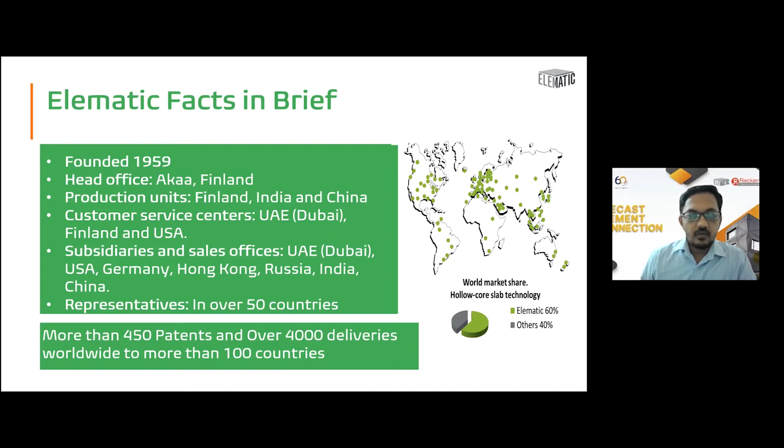It is designed in Finland and then goes across. It has production units in Finland, India, and China. The customer services representatives are in UAE, Finland, USA. We have subsidiary offices and sales offices in UAE, USA, and various other areas. And representatives are there in over 50 countries. With this small introduction, I'll also give a small introduction about my department.

So this is basically a design team which I'm leading, where I have an expert team of structural engineers and BIM modelers, building information modeling. The major experience that we have is in design of precast as well as cast in situ and steel structures for all types of structures, industrial, commercial, from low rise to high rise. And we are very much confident in different codes like IS, ACI, European, New Zealand, and British standards.

So as a design team, the services that we provide to our customers are precast designs. We do high-rise building design. We do feasibility studies. We do various calculations and quick cost analysis. We do pre-stressed concrete design. We have building information modeling of all the disciplines, not only structures, but architecture, MEP, as well as 4D and 5D sequencing.

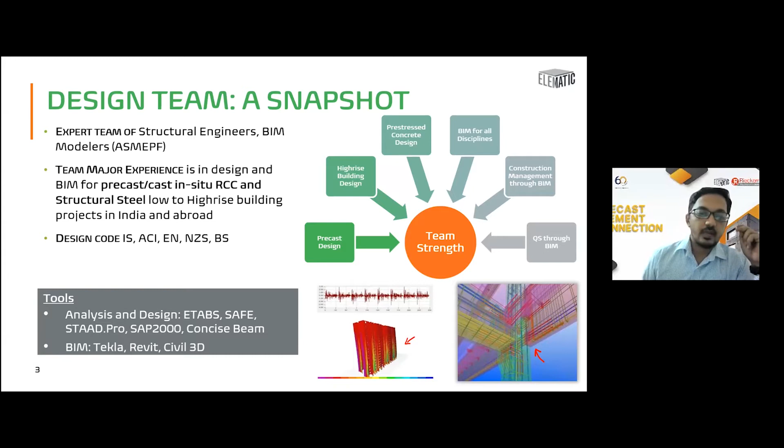Okay, so starting with the precast connections. So as I told you, precast connections definitely form a very integral and important part of all precast buildings, because precast connections ensure that all the elements of the precast, which are cast on ground and then erected at site, behave together and do not fall off from each other.

So depending upon the intended purpose of the precast connections, we can categorize them into different types. The basic category of precast connection is between dry connections and wet connections. Now, the difference is that in the dry connection, there is no grouting or in situ concreting required to be done.

You have embedded steel plates with anchor bolts coming out. And the other precast column is also having the same steel plate with anchor bolts coming out. And then on site, you just connect them using an in situ steel plate with anchor rods. So this type of connection is fast, but obviously it does not behave in the same way as the cast in situ structure.

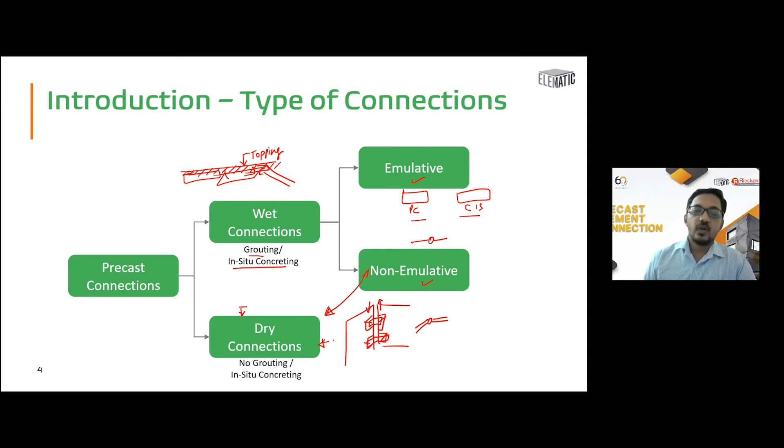Moving on, there are other categorizations of precast connections also, depending upon the requirement or the exposure of the precast connections to seismic waves. Because in the presence of seismic forces, the forces are of reversal and cyclic nature. So the precast connections will be subjected to quick cyclic and quick reversal of forces, which they should be able to withstand. Those are the seismic connections, which I will show you in a short while, the differences between them.

And the other type is the non-seismic connections. Non-seismic connections are the ones where the major purpose of the precast connection is to carry forward the gravity load, whether in the form of moment transfer or shear transfer. Its purpose will be primarily limited to gravity load, not reversal cyclic loading.

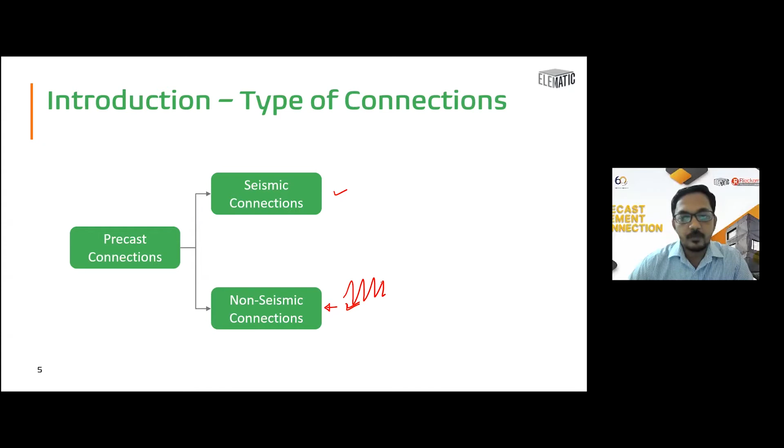Okay, moving on to the next one. So here I'm starting with the connections part. I'll be showcasing mostly all the connections that I have been using. The way I have formulated this presentation is in three parts: commercial, residential, and industrial. So we will go category wise and see what types of connections are used in different scenarios.

So here is one of the buildings that I'm doing, which is a tall structure. It is a 50-story, 40-story structure.

So the top 35 stories we are doing in precast. This commercial structure is majorly office, and these are the types of connections being utilized. If I go into detail on each connection: in the first connection, you have the perimeter beam, which is connected with your precast solid slab.

Here, in order to ensure that the beam is successfully tied with the topping, we have projected the inside bar of the beam outside into the topping area, and one bar is going inside the precast solid slab. The purpose is that the beam has to be tied with the topping. All the precast elements have to be tied with the topping and intertied with each other. That is the advantage I get from this type of detailing.

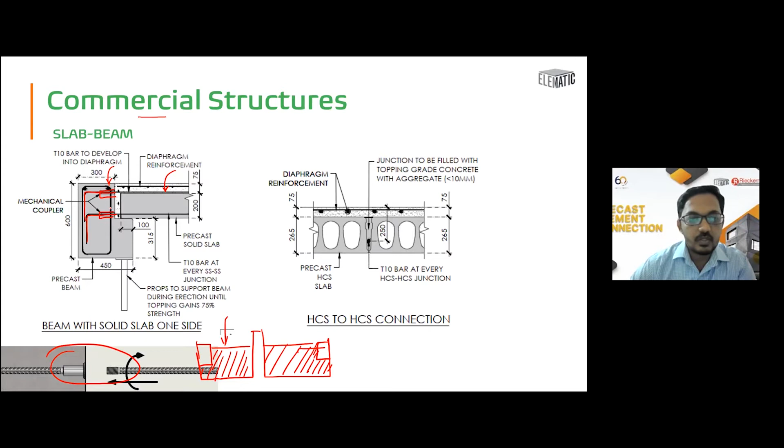These blockout boxes cannot accommodate reinforcement projecting out from inside. That is the main purpose of providing the mechanical couplers. This thought process should be in the designer's mind even when doing the detailing for the first time on any project, to ensure that production is smooth.

Coming to the next connection, hollow core to hollow core. Here I would like to highlight the criticalities. One is that you have this groove on both sides, which is very thin and narrow, around 30 mm to 50 mm. So to fill this joint, it is important to have an aggregate size of less than 10 mm so that it goes inside well. Secondly, we have placed a 10 mm diameter bar at the HCS to HCS junction.

The purpose is that whenever there is differential loading, with the hollow core on the right loaded more than the left, a shear transfer is required for both slabs to act together, and it has to happen through this joint. Therefore, the reinforcement and the aggregate size ensure that the shear capacity of this joint is strong enough that differential loading does not lead to differential settlement and failure of this joint.

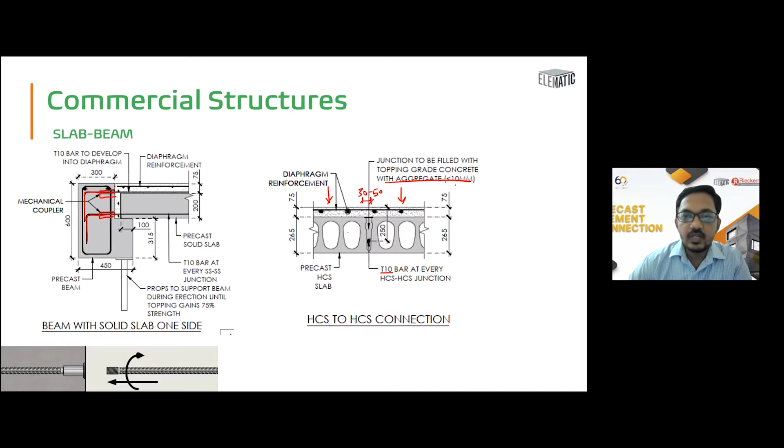That is why between hollow cores at a typical floor, you normally require one reinforcement bar here, as well as a grout or topping material. We have used the same grade as the topping, just filled inside with aggregate size of less than 10 mm. Okay, moving on to the next connection.

We also need to see the erection sequence that should be kept in mind. When you are placing the hollow core slab only on one side, there will be a tendency for this beam to twist when the topping has not yet been cast. In order to support that, we provide these props at regular intervals when we are erecting the hollow core slab. Once the hollow core slabs are erected, the topping is placed and the topping gains 75% of its strength, only then are these props removed.

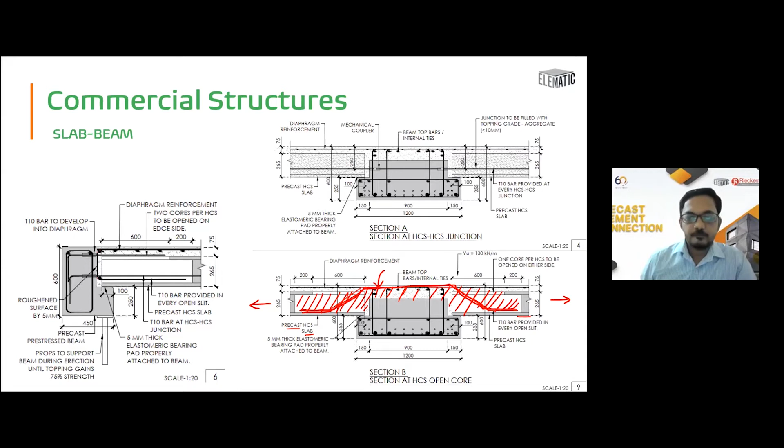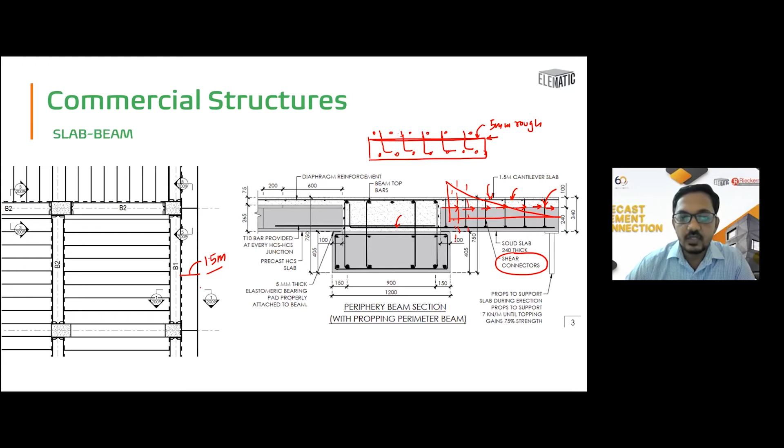Now, some people roughen the top surface, which can also be done; 5 mm roughness can be provided. But for this critical kind of situation where we have the cantilever slab coming out, it is good to provide these shear connectors at every regular interval when you are doing the topping. This way, both elements will behave together, and there will be no chance of failure.

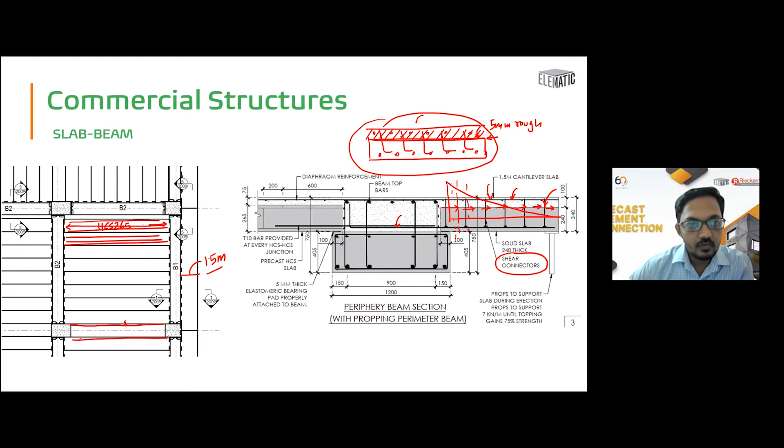In commercial structures, this is another type of structure I would like to talk about. If you see in the plan view, I'm coming back to the plan view for a second. This is my hollow core, HCS 265, which is resting on this side and on this side. But my question is, what will happen on this side, and on this side? When we have a beam on this side and on this side, resting is not required here because it is a one-way span. All my strands are spanning in this direction. So what should the connection be here?

The problem with this type of connection is all your main strands are in the perpendicular direction, in this direction only, but there is no reinforcement in the precast slab in the horizontal direction. So if you stop this edge, and this edge is a little free to deform, together they will start deforming. This edge will go down, but this edge will remain up. So there are chances of bending moment stresses in this direction. Since we have not provided any reinforcement in the X direction, it is not good to have connections supporting the hollow core slab on one side on the beam.

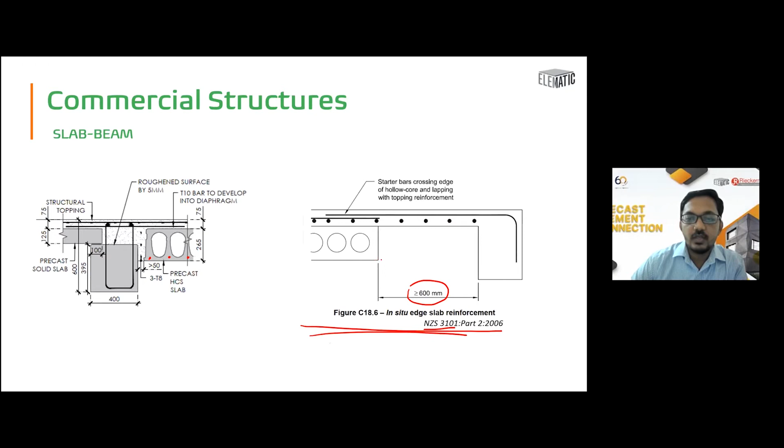If you see the cast-in-situ slab edge reinforcement given in NZS 3101, they provide this gap of 600 mm done only as topping. It is the same theory behind this. The only thing is this could be a good solution when we have a false ceiling below, so that it doesn't look awkward to any observer below and raise concerns of structural problems. So where we don't have a false ceiling below, we provided this type of connection where a 50 mm gap was given.

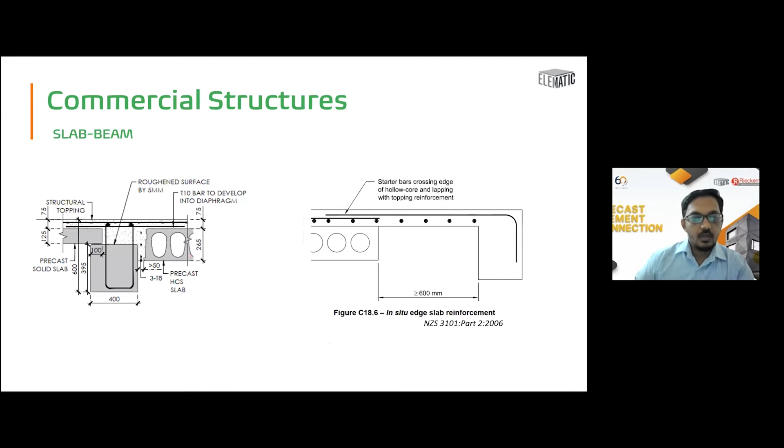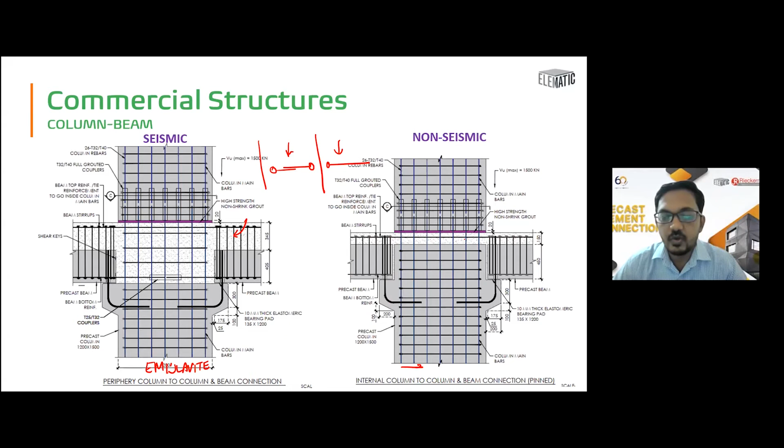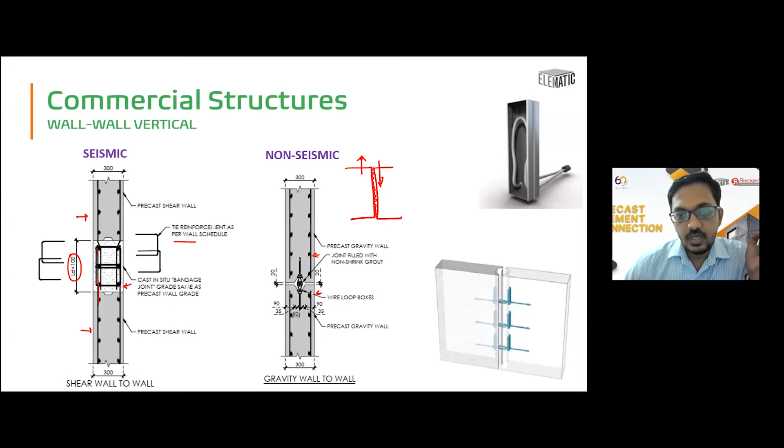If one wall settles and the other wall is at this particular location, then there will be chances of formation of cracks, which we don't want. But at the same time, we don't want these two walls to behave together. So that is where this type of Peikko wire loop connection comes, which has a wire loop box, a kind of box inside which you have this kind of flexible wire. So somebody can just simply pull this off once it is installed. Once the element is cast, you can just simply pull this off.

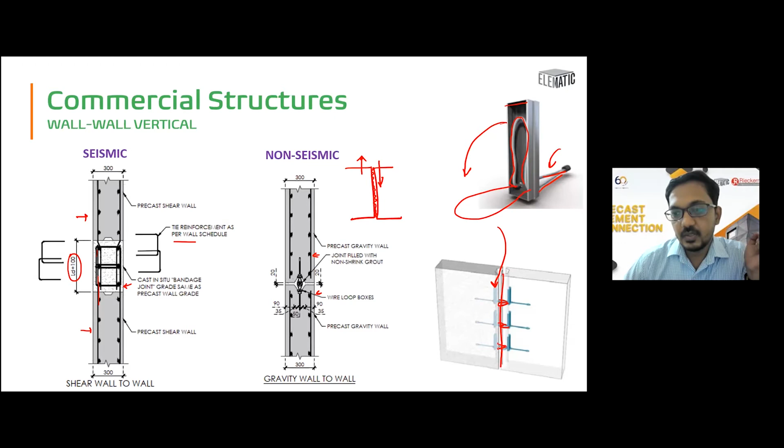So then it will come and it will form like this. So this is what you can see over here also. It has come from both sides, and then a bar is placed inside together, looping these two. So the shear behavior happens because of the presence of this groove, as well as when the concreting is done, the concrete flows inside this cavity also, which was created when the casting of the wall was being done. So effectively, your joint concrete, in elevation, looks in this format, which helps in transfer of the shear as well.

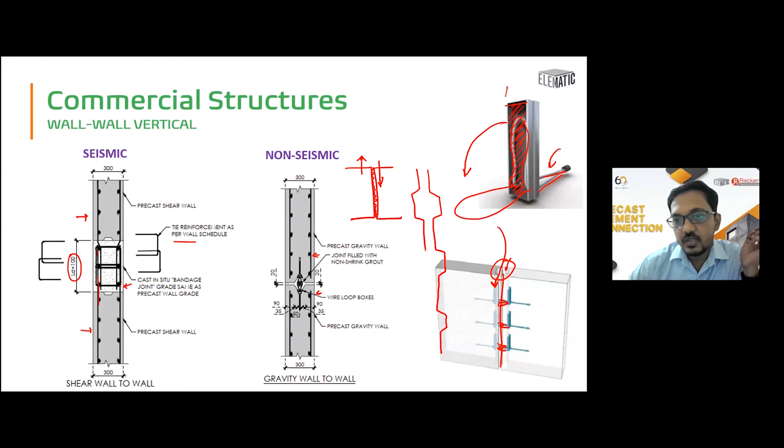Quickly moving on to the next one. So this is the example of the commercial connections, where there are two types of connections, as you can see. In one case, on the left side, the main longitudinal bars are going continuous from below to above. This type of connection in our tall structure we are taking in the lower stories, while the other type of connection we are taking in the above stories, where the reinforcement requirement is very low. So here we have bars stopping over here, and only the middle bar is continuing above.

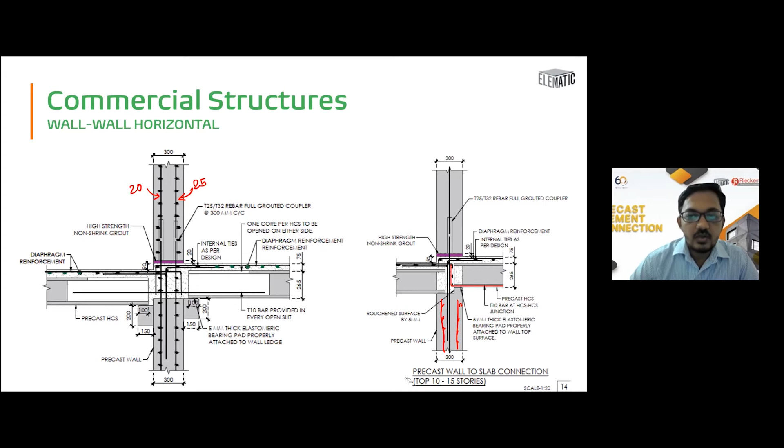But here, if you have a vertical bar diameter of say 20 or 25 that is going to come over from top to bottom, then replacing those with a single dowel will require a huge amount of bar and very low spacing, which we don't want. So here, the continuity of the bar becomes important in the lower stories, where the stresses are going to be very high in the walls. But in above floors, where the stresses are low and the reinforcement requirement is low in the wall, there we can go with a single layer of connections.

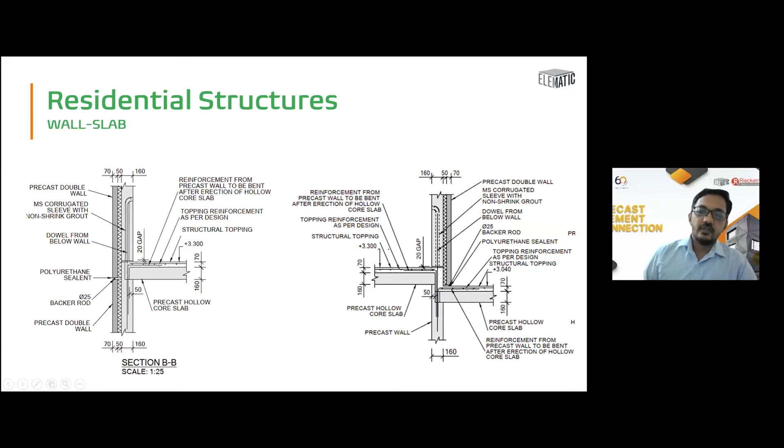So the advantage that you will get because of this is that even if there is rainfall and this wall surface becomes wet, the path of water to eventually come inside the floor is very difficult because it is against gravity. So that advantage you get if you have this double wall kind of system, which should also reflect in your detailing of precast connections. Same, if you can see on the right side, this is a floor system, and this was the balcony system. So in the balcony, we have the facade going all the way from up to down, which ensures the same water path becomes difficult, and it adds another layer of safety to your waterproofing systems.

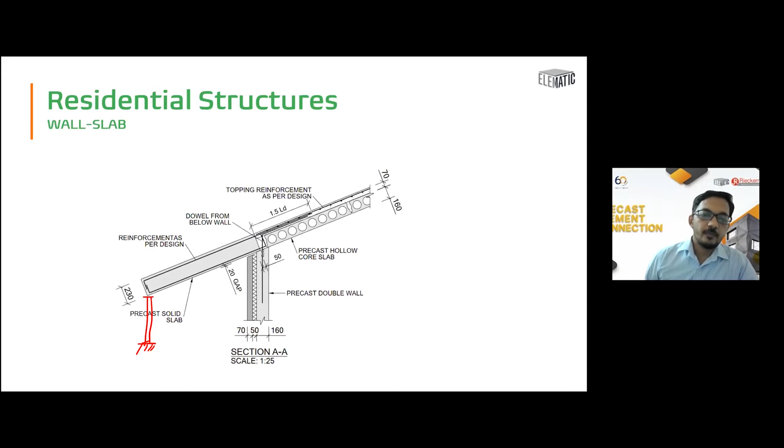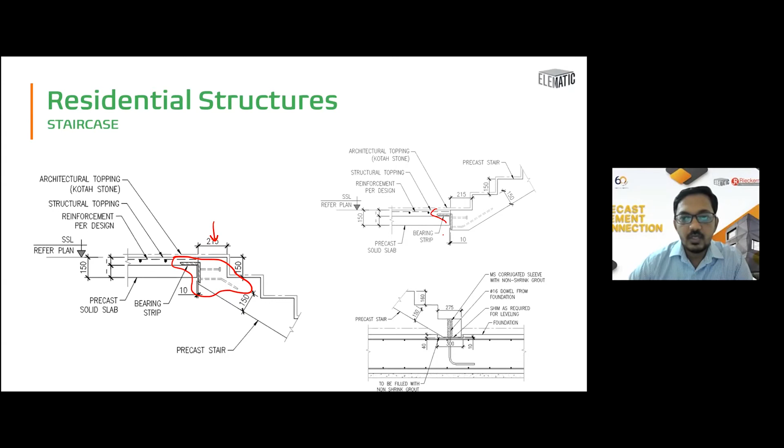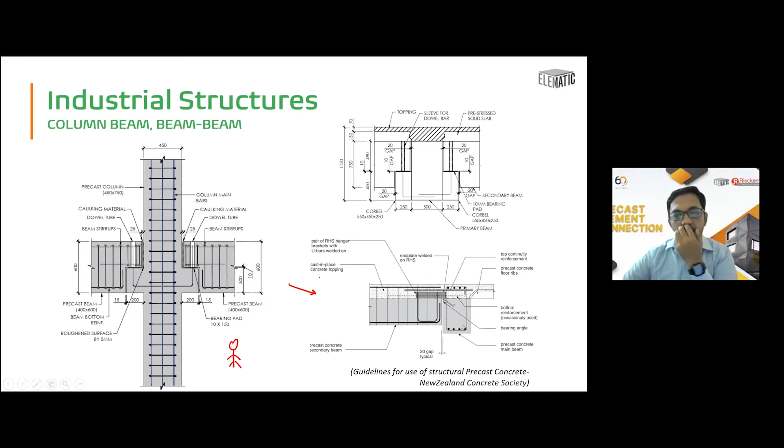An equivalent of that is also given in the guidelines for the use of structural precast concrete by the New Zealand Concrete Society, where they have embedded a steel plate along with the casting of the precast concrete, and then it is placed on top of your beam, provided with the proper supports, a proper base for the steel plate.

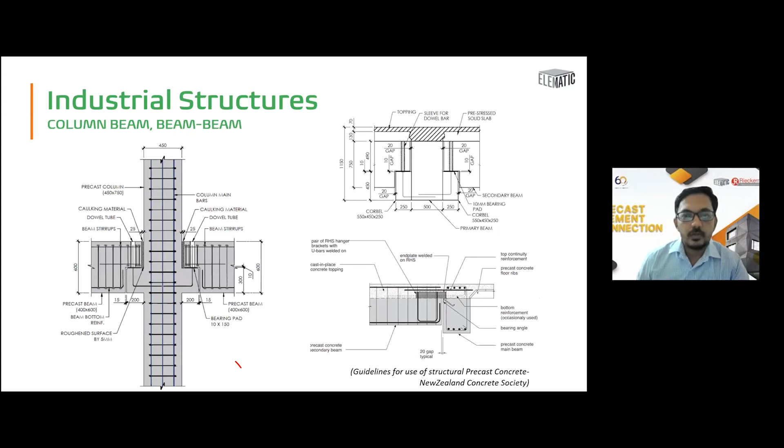So coming to the column to foundation connection, these are the basic connections where we have the dowel tube connections, the bar coming from below into the dowel tube, which we have seen, and the mechanical connections. I'm sure you must be thinking how these connections are going to behave in an earthquake. I'll come to that point later. But with respect to column and foundation connections, there are a number of solutions available, and I'm going to present a few here, depending upon the exposure that I have.

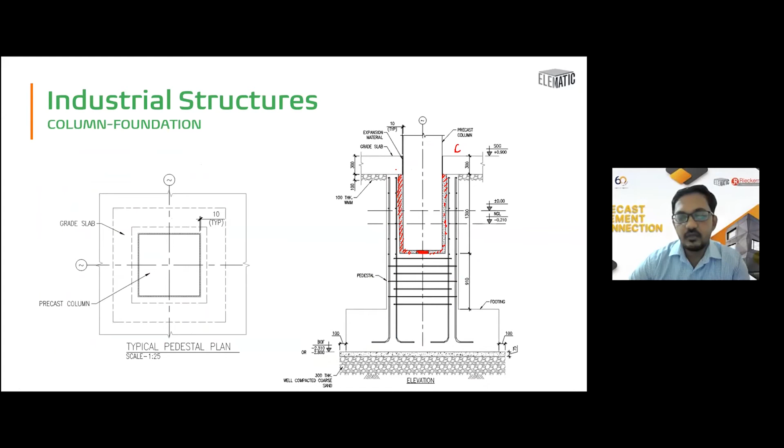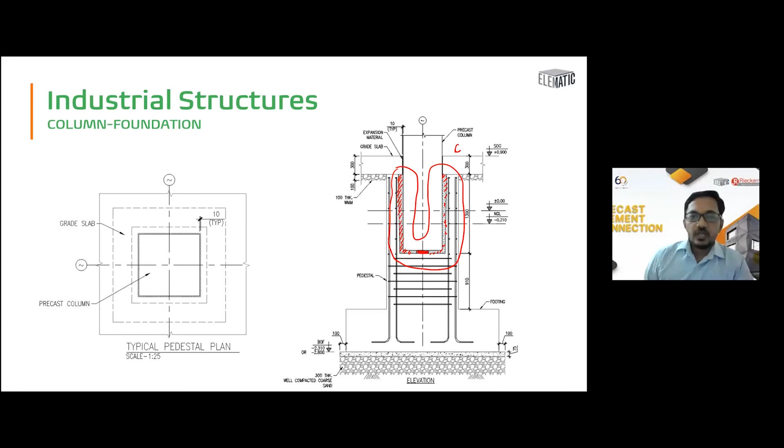So the important question that must be coming in your mind is what will happen in the seismic scenario in this particular case. There have been various studies done to acquire the behavior of these connections. One such study was done by Belleri and Riva, where they performed the cyclic loading test on the monolithic column foundation and the precast column pocket foundation. And similar studies have been done with respect to dowel connections and coupler connections. They found that in all those connections, the behavior, if not improved, was at least similar to that of the monolithic column connections.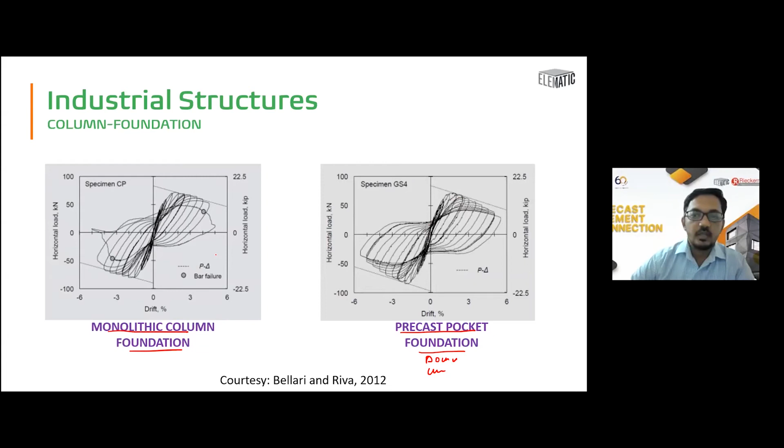So that is where we had the advantage. So it can definitely be said that it's incorrect to say that precast connections will not be able to sustain the cyclic loading, because the behavior of the structure is the same as that of the monolithic, and in fact the performance is even better and more consistent than the monolithic column foundation.

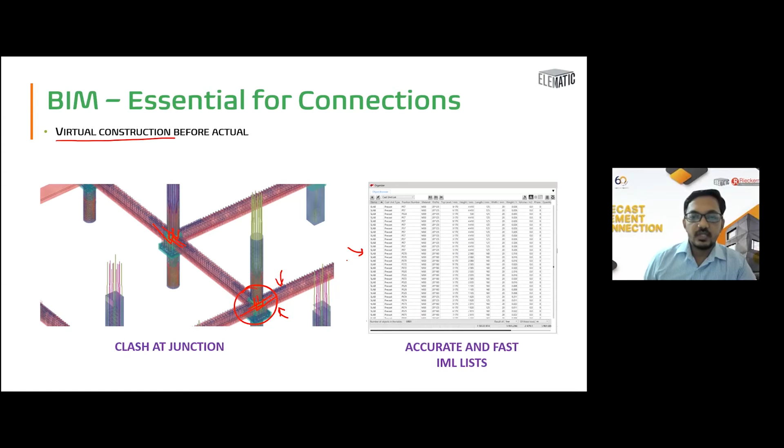At last, I would also like to explain the importance of building information modeling. As you can see, in the moment connection, a number of bars come from either side of the beam into the joint. So it is important in building information modeling to have the bars modeled accurately and checked that they are not clashing before you give out the shop drawing for casting. That way, as you're doing the virtual construction in your computer, any clash you can accommodate quickly in your changes, and you can ensure that no clashes happen at the joint while releasing it to site. Secondly, the advantage is also that you can get the insert material list output accurately.

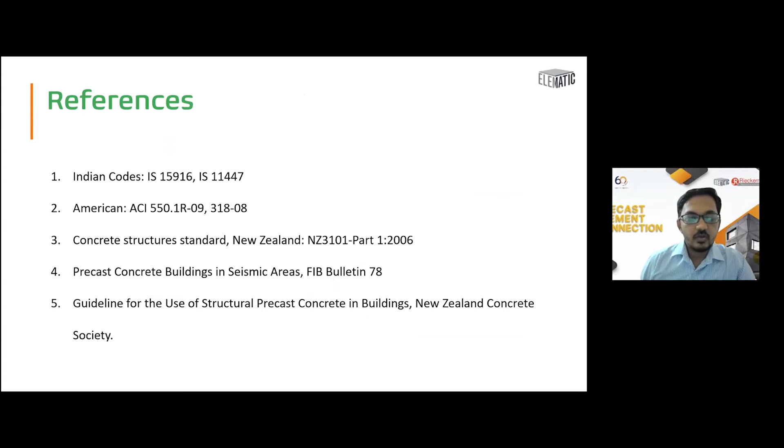Okay, thank you, Mr. Nishant Sharma, for the wonderful presentation. I think the key of precast construction is in the connection. Your presentation has shown very clearly the potential of precast in construction, and from that we can learn so much: the structure can withstand the seismic force beautifully, and we can also control the behavior of the structures. So with that conclusion,

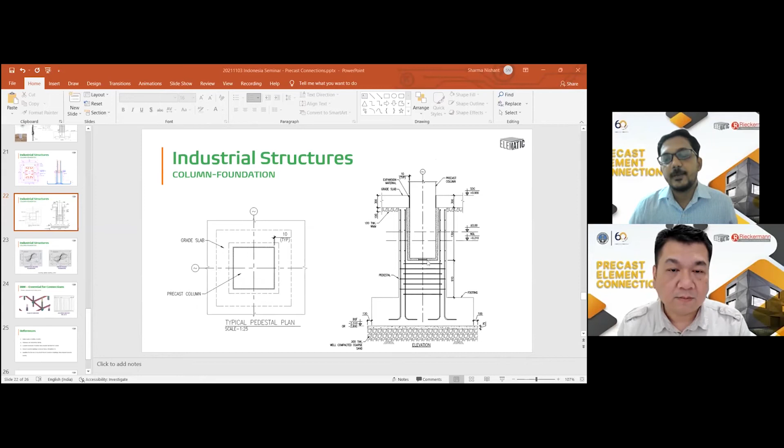Okay. So also the thickness of the pocket walls should be calculated also, right? Yes, absolutely. The thickness of the pocket walls has to be calculated based on the type of the forces that are going to develop as a result of action of these moment connections. So when you have the value of P and you have M and then you have V, this will translate into your local forces over here. So this is how they have explained that it's to be designed.

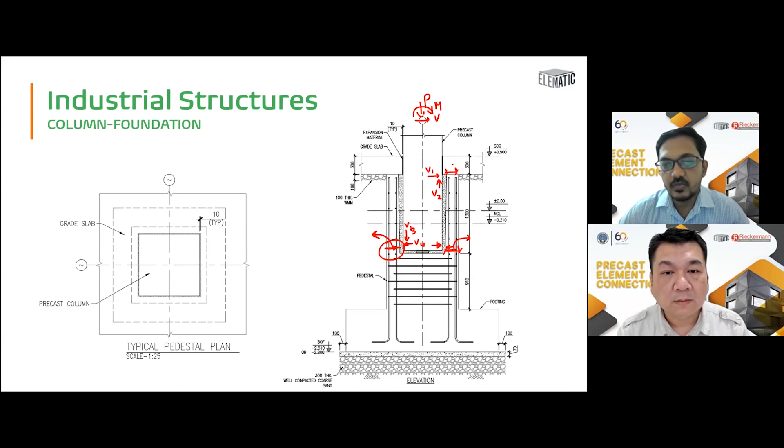So you will have these forces which have to be calculated, and these forces will then be coming as a kind of a reaction into your pocket. So this wall should be able to take that much amount of shear. So this is how we design the pocket wall thicknesses. And since the moment is very high and this is the moment arm, the base reaction over here is usually high. Therefore, normally you will find that the pocket wall thickness is very high at the lower end, but it reduces to a little lower value as we go up. Oh, okay. I think it's very clear.

Okay, any other question, please? We already prepared a significant amount of time so that we can have this kind of session. So please don't be shy to ask. And this is especially important because of the connection. If you have any question, please share your question and discussion.

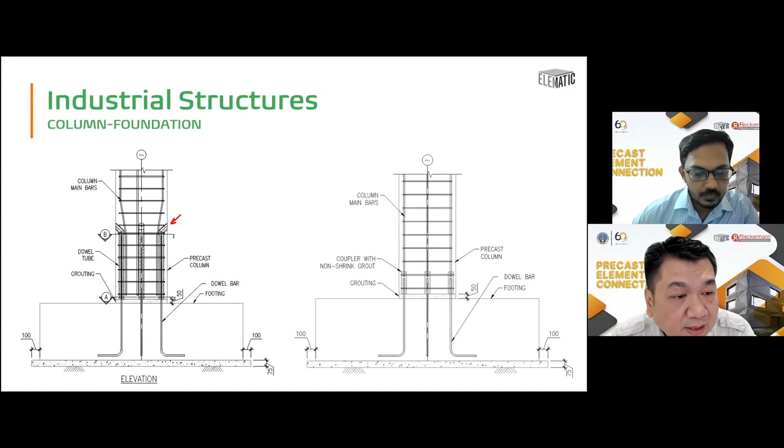Sorry, please return to the previous picture, the first picture. Yeah, this one. For the left picture, it seemed that the grout goes from top to bottom. Is it still the same as bottom to top, with no air? Here it is from top to bottom, but here the available sleeve diameter is very large, for example a 75 diameter sleeve. This is a corrugated sleeve of this shape, either 75 or 50 diameter.

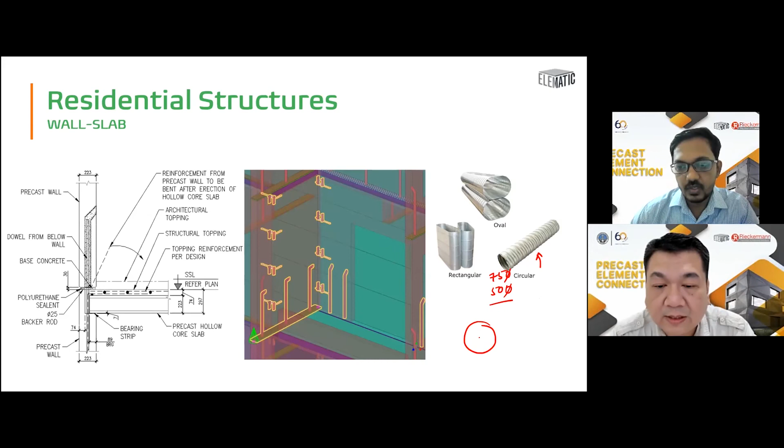So with this particular sleeve, your bar is going to be in the center, for example 20 diameter. This definitely gives you enough space on all sides. Here it is always from top to bottom. When you start pouring, it has enough space and it will fill inside.

And since the corrugated sleeve has grooves, it automatically bonds with the concrete outside. The grout, a non-shrink grout with a very small aggregate size, will also fill the inside of the grooves. So the shear connection between the grout and the corrugated tube is better from outside as well as inside. That is why we always use a corrugated tube.

Okay, so the conclusion is for the smaller hole, you always fill from the bottom up. Yeah. But for the larger sleeve, you can go from top to bottom. From the picture, there is still a large space from the top of the rebar to the top of the hole, so we can ensure the connection can be filled fully. Absolutely.

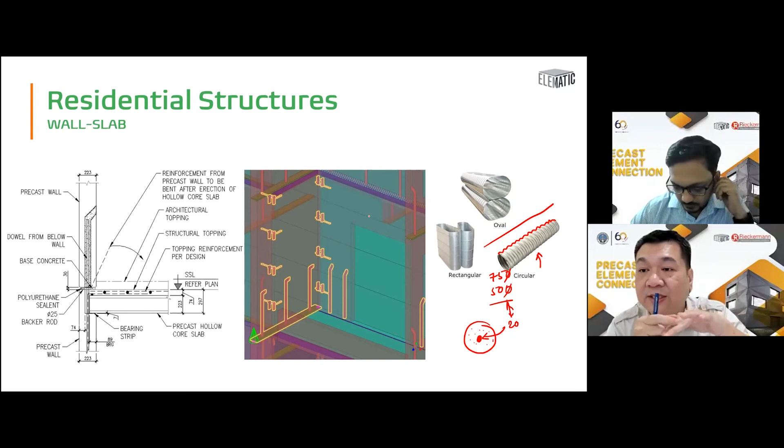One question I have, for the other picture showing the bolt connection: will this connection be grouted also? This connection? Yes. For the bottom one, I see you just tighten the screw, so it doesn't need any grouting? No, this cannot be left exposed like this.

Ultimately, you have to provide a shutter from all sides. You have to fix the shutter from all sides and then start pouring the grout from all sides. Okay, so just like a steel connection, we need to fill it all together. Ultimately, it will be covered from all sides. It need not be grout. It can be a simple mortar as well.

The purpose of the same will be such that this bolt and the nut is not exposed to the weather at the later stage. I see. Yes. So it will be same as this, as shown in here. You can see. Ultimately, this mortar fills this region completely, and because of that, it is not exposed to the weather, and rusting will not happen.

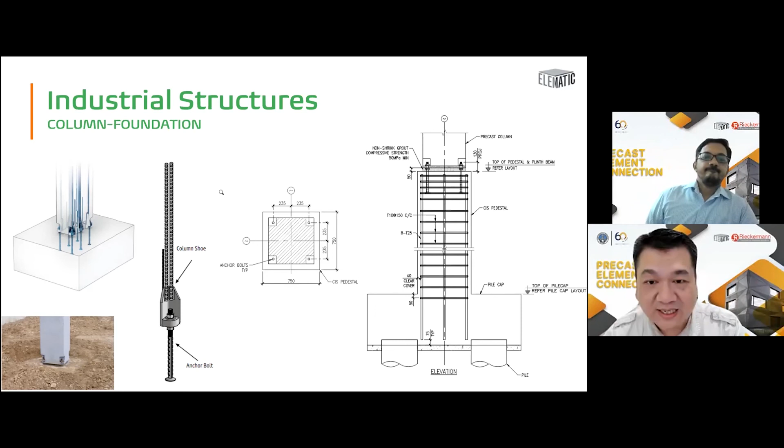Silakan Bapak Ibu, silakan. Any more question, please? Just raise your hand and I will translate for you, or you can just ask yourself. Very good discussion. Sudah berapa menit ini? Kira-kira sudah. Ya, we still have short time, not much, but okay.

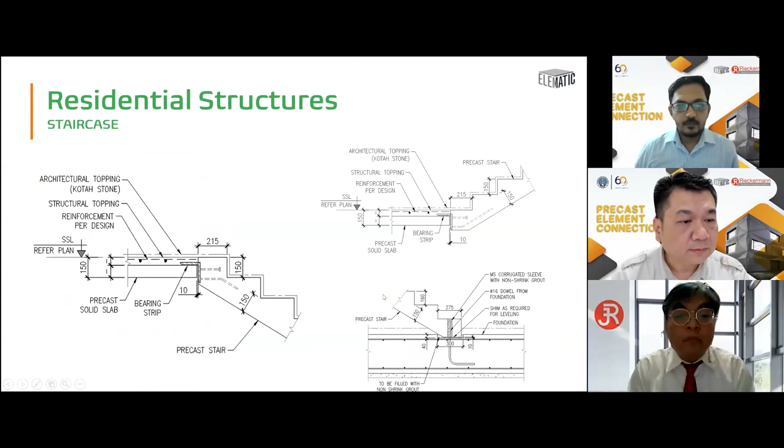Yes. So as you can see in this particular connection, both the bottom and the top reinforcement is not continuous into the wall. Even after being cast, there is no wet connection over here. This is kind of a dry connection. We are just placing and we are doing the grouting over here. That's it. So the bottom and top reinforcement is here. So this will not participate in the precast wall stresses, even though this is a shear wall structure.

Now, further, to answer your question about the movement part. So here we have taken a gap of 15 mm, but this can be checked after the analysis as well, how much sway is coming because of the participation of this particular wall in earthquake. That much amount of gap plus the minimum seating, that much corbel can be provided.

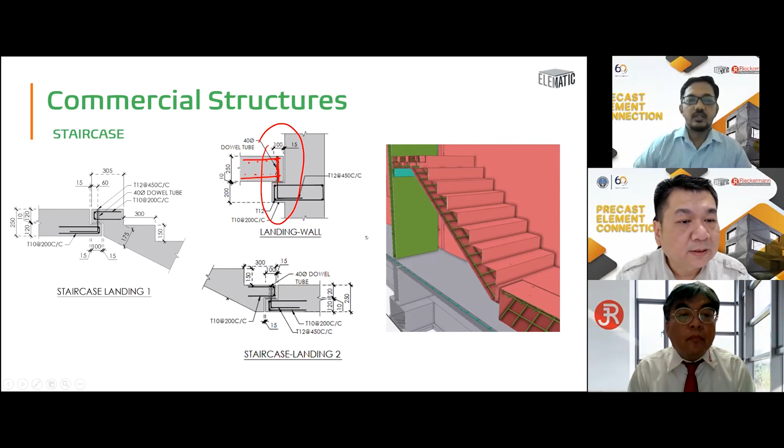But as you can see, after the gap is provided, still the main importance of this connection is that it should be a pinned connection, not a fixed connection. And the pinned connection is being provided through this type of connection. Okay. So the short answer is yes, you still have to design it, and design it carefully, because the stair will act as additional braces when it's fixed. So give the distance and just ensure the pin connection.

Okay, thank you. Okay, another question. From Mr. Christopher, do you think the precast system on the stair you described can be applied in housing projects in Indonesia effectively? In this case, do craftsmen and workers need special skill or certification? Just give a comment on the application for low-rise housing.

Yeah, I think it is going to be absolutely efficient to apply in housing projects, especially because there the modularity of the staircases is very high. The same staircase scheme is utilized almost everywhere. So one precast mold which is serving for the staircase at one location can create all the staircases at every location.

Now, with respect to the skills requirement, if your craftsmen and workers are skilled for precast connections, then I believe they will be able to do these staircase connections as well, because staircase connections are no different than other precast connections. So it can definitely be achieved. It is not impossible. Okay, thank you.

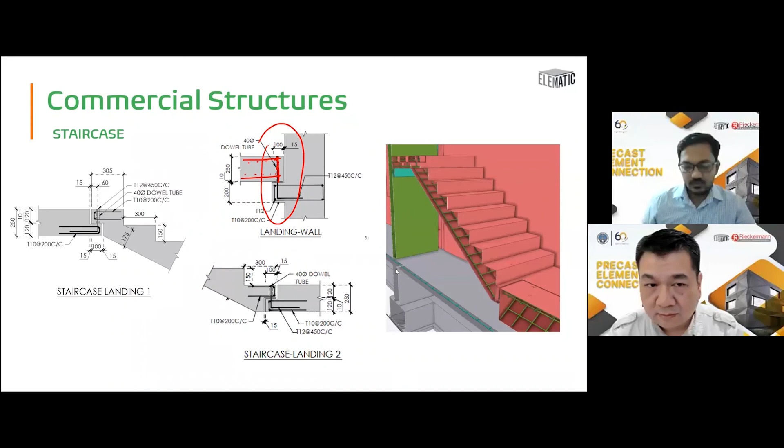The question is correct that in the critical areas with seismic loads, the formation of a plastic hinge is accounted for in the design, because the engineer always has a response reduction factor which accommodates the formation of this plastic hinge. That is the reason why I added the slide showing the comparison between the monolithic and the precast connection.

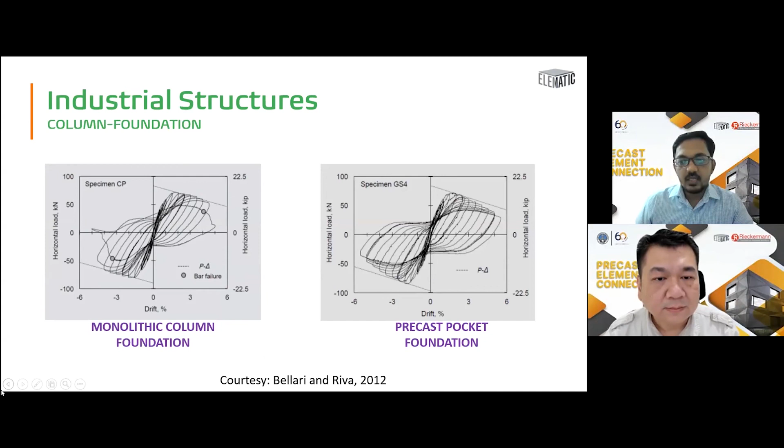Secondly, to talk in detail about the splice connection, I'll go back to that slide. Sorry. Basically the plastic hinge is going to form over here. A monolithic bar would have been a simple straight bar with the stirrups around it, which you will agree, and it is replaced with this type of connection. So here the splice strength plays a role.

As structural engineers, we always define the performance criteria for this coupler, and the requirement we set for vendors is that its capacity should be at least 1.25 times the capacity of the reinforcement bar. So this region is now stiff, but the bar is behaving continuous. So any failure will happen outside the coupler region only.

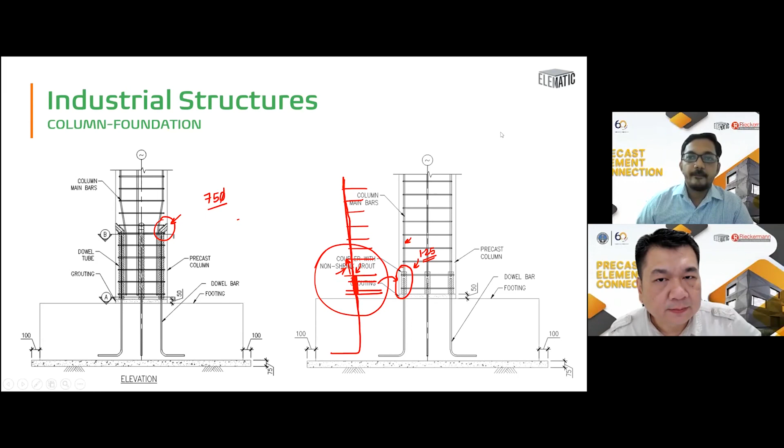Outside the coupler region, you have the reinforcement bar, which is designed to yield in the event of an earthquake. That is how we ensure that in a seismic event, the plastic hinge will be taken care of without failure in the splice. Okay, I think that is the key of the design. When we design the connection, we always ensure it can perform better than the elements we are trying to connect.

With that in mind, a comment from Mr. Chong Chung Eng: coupler and splice sleeve are bar break systems. So what does bar break system mean? It should not break? Yeah, I think he's acknowledging the answer, where I mentioned the splice has to break only after the reinforcement. So the reinforcement will break first. Okay, so the connection should be stronger than the connecting part. That is the main idea.